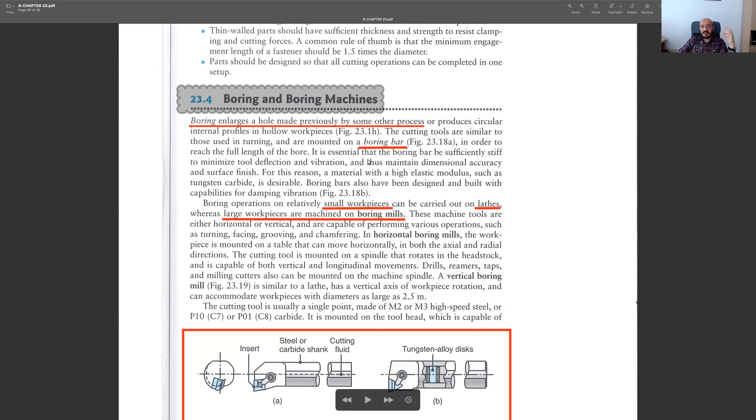In order to do this boring operation, we need to have cutting tools installed on boring bars. Usually this is a boring bar, and at the tip we have inserts very similar to the ones used in other machining operations like turning or milling. Since this boring bar is quite long, in order to remove problems related to vibration and chatter, we need some kind of tools to increase the stiffness of our tools. For instance, we may use special alloy discs or special materials inside the boring bar so that vibration is decreased and stiffness is improved.

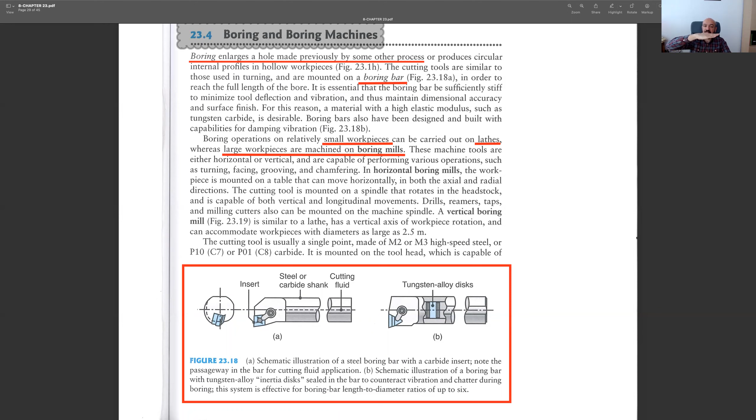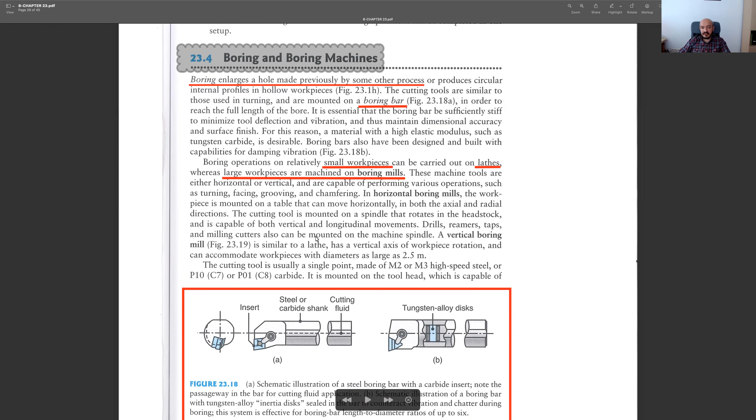We can do these boring operations on lathe machines. We need to simply mount our boring parts into the tailstock and then do the boring. But if the workpiece is quite large, then it's better to consider doing this boring operation on a separate boring machine.

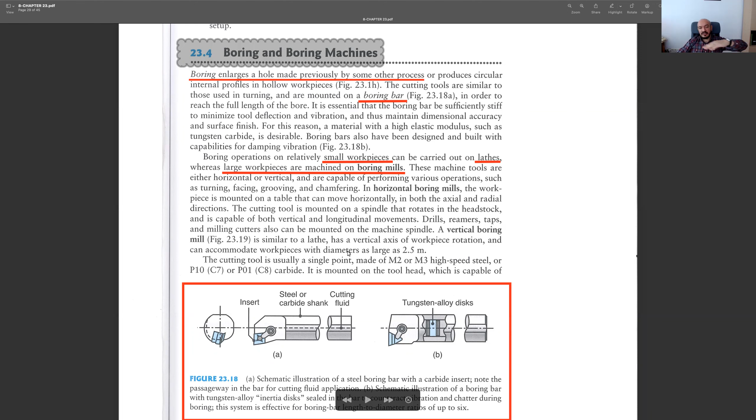We have two types of boring machines: horizontal boring mills and vertical boring mills. The second one is much more frequently used, but their fundamentals are the same. They have a kind of table, and in the horizontal boring mill, very similar to our lathe, the cutting tool is moving in the horizontal direction and going into the workpiece to do the boring operation.

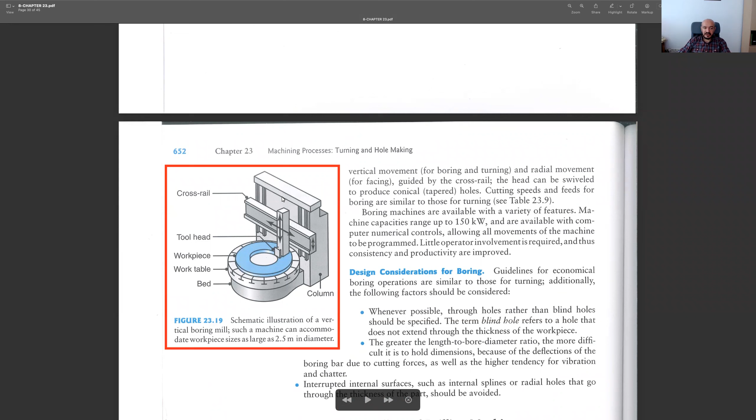In the vertical boring mills it's a bit different. We have our workpiece mounted on a table, rotating at very high speeds, and then we have a cutting tool moving in the vertical plane, only in the x-axis. So these are the main differences between horizontal and vertical boring mills.

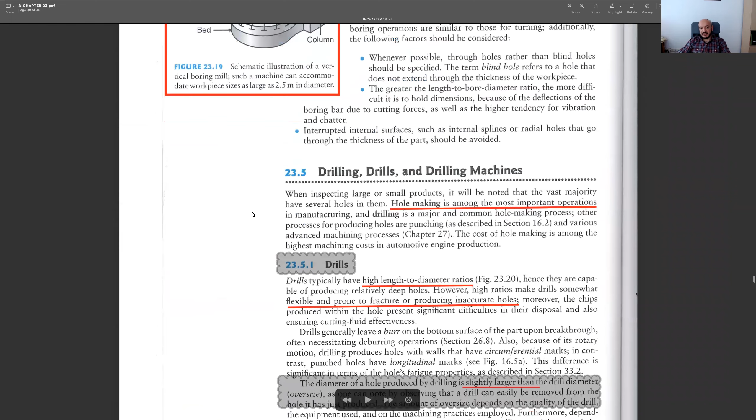Now I will jump to drilling operations. We said at the beginning this chapter is about turning and some hole making operations. Drilling is one of the main hole making operations. The operation is called drilling. The tools we use in the drilling operation are called drills, and the machines are simply called drilling machines. We know hole making is quite important, especially when doing assembly operations.

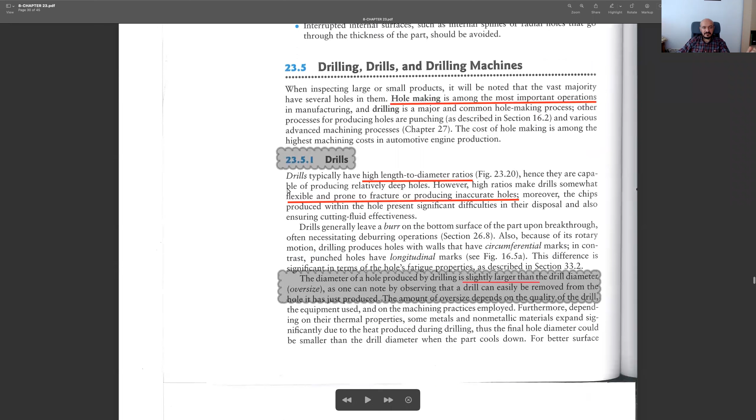If you want to join two parts together, then probably you need a kind of hole in maybe one of them or in both, and then later put some other components inside and join these parts together. The easiest approach to open holes is actually drilling. That's why we have many types of drills, types of tools, and some other types of machines under this drilling operation. I will start by discussing the types of cutting tools we use in the drilling operation.

The tools are simply called drills, and usually they have high length to diameter ratios. Assume this is your drill, your cutting tool. As you see, its length is very high compared to its diameter, and that's why it's quite difficult to have stable drills during the operation. Since they are longer and their diameter is not too large, they are quite flexible and can easily be broken, or you may have cracks on the surface, which will result in inaccurate holes.

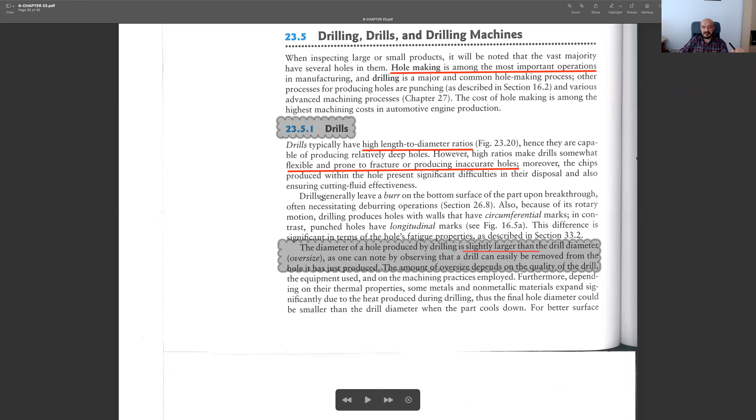That's why after the drilling operation we perform other operations to increase the quality of our surfaces. Another issue about drilling is that most of the time the size of the hole is quite larger than the size of the drill, so that we can easily remove our tool throughout this hole. This has several reasons. First of all, since we have high friction due to heat generated, we get high temperatures around the hole, and the workpiece will actually enlarge due to the high temperature. Then once it's cooled down, its diameter will decrease a little bit, and that's why at the beginning we can remove it a bit easier, since the size of the hole is a bit larger than the size of our cutting tool.

Another reason: if it's a brittle workpiece material, then probably we have removed too much material from the surface of it, and there might be several reasons for this. Another reason is that if your cutting tool is not stable and is vibrating, then probably it's removing more material from the surface of your hole. Due to these reasons, the diameter of the holes we machine is usually larger than the diameter of the drill, and that's a nice outcome since we can easily remove it from the opened hole.

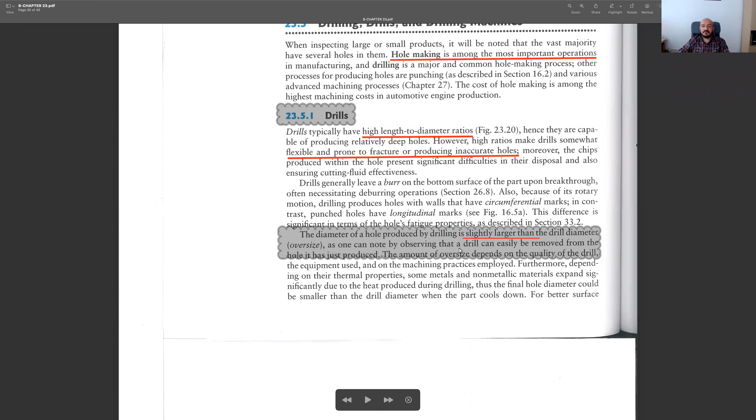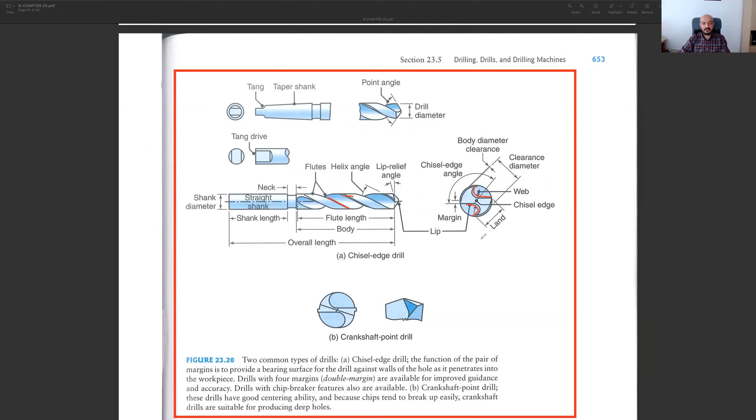We also have some diameters, but they're not as important. The important ones are the chisel edge, the web region, and the land. These are the most important terms related to drills.

Let me continue with some types of drills. The first and most popular one is the twist drill. You can machine most materials with it. You can see some typical angles: point angle about 120 degrees, relief angle about 10 degrees, and other angles like the helix angle, which is quite important since it determines the strength of your tool. We will discuss this more during the videos, but make sure you know what these angles refer to.

There are different types of cutting tool materials. We start our discussion with the twist drill, the most primitive and maybe the most frequently used type. Their diameters range from little to very high. Their hole depth to diameter ratio is not too much.

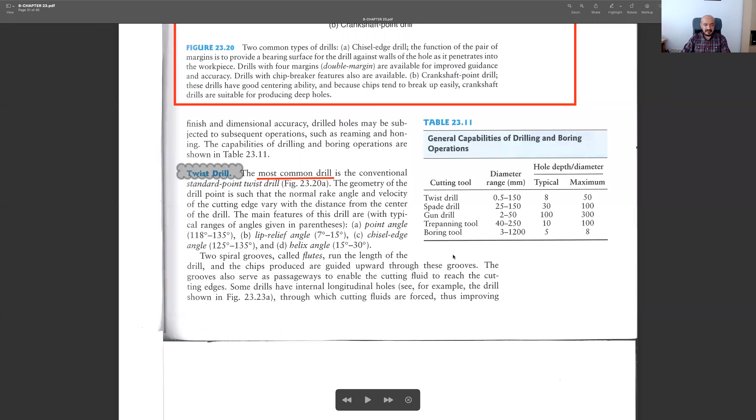If your hole is a bit deeper and the diameter is too small, it's better to use gun drill type cutting tools. These are specially developed for opening deeper holes with less diameter. We'll discuss these in a moment, but this is the first one as I mentioned.

In core drilling, we start the operation on an available hole. Our aim is to increase the size of this hole by very high amounts. We don't just increase the diameter by 2 or 3 millimeters; we are increasing it maybe by some centimeters.

Then we have counter boring and counter sinking operations. These are performed on available holes. Counter boring's aim is to obtain a kind of step so that you can put your bolts into it. Counter sinking is similar, but this time you have tapered conical surfaces, and we use it especially for screws and other joining elements. The difference is that counter boring has a kind of stairs, while counter sinking has conical surfaces.

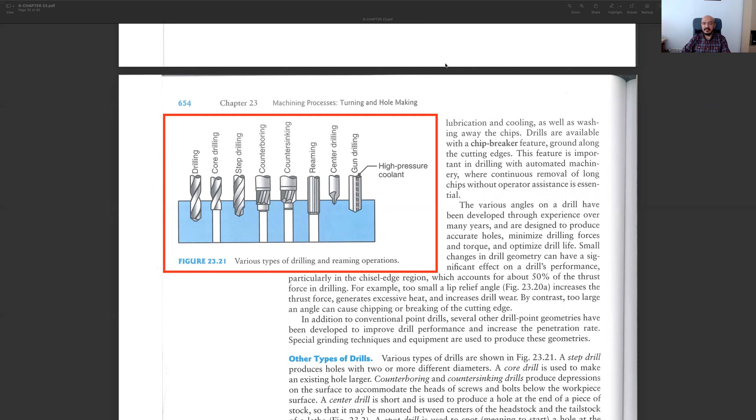Once you have a little hole at the surface, you can then start drilling, since this time the drill will not be able to walk on your surface. And then lastly, we have the gun drilling operation. It's especially used for deeper and smaller diameter holes. Its length to diameter ratio is very high, around 300, and that's why we need special drills like gun drills, so that you'll have highly accurate, deeper, and smaller holes.

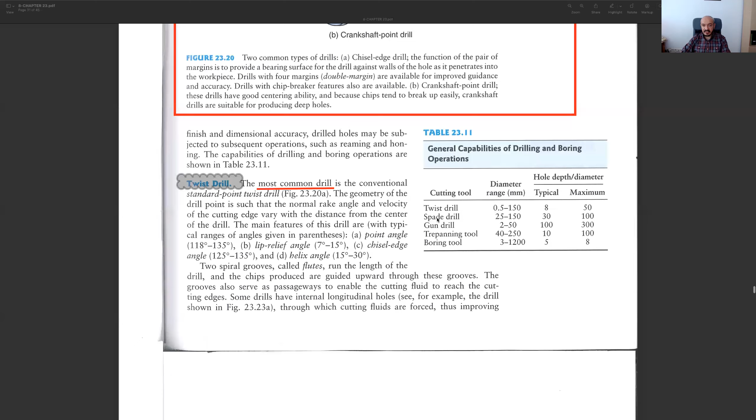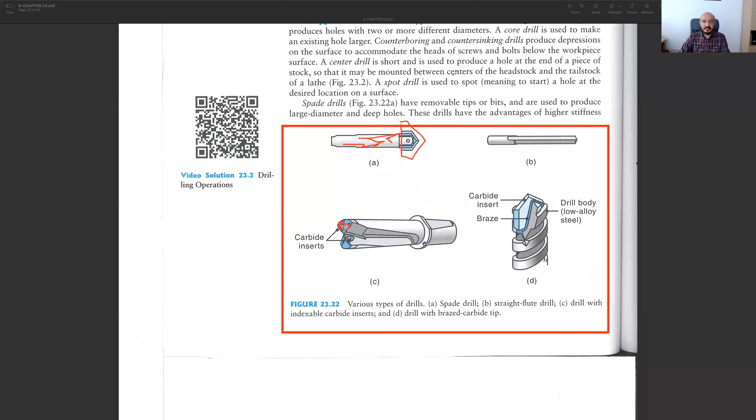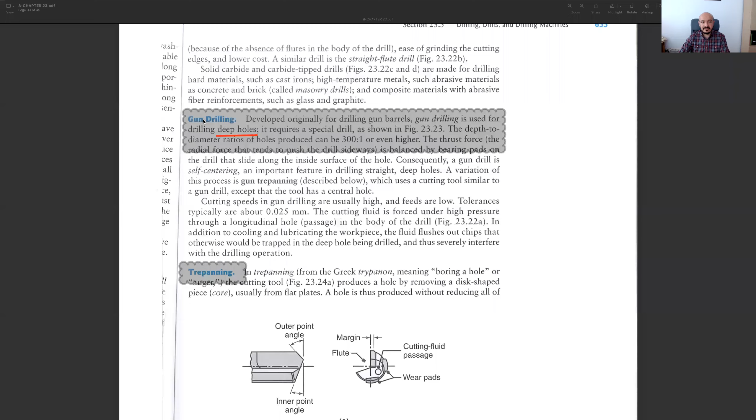Let me jump to the other ones. Then we have gun drilling. As the name implies, this is useful for drilling deep holes with a length to diameter ratio around 300 or maybe even higher. The thing about these gun drills is that you need to have proper chip removal systems and proper coolant application systems, otherwise, due to the high heat generated, you may have problems.

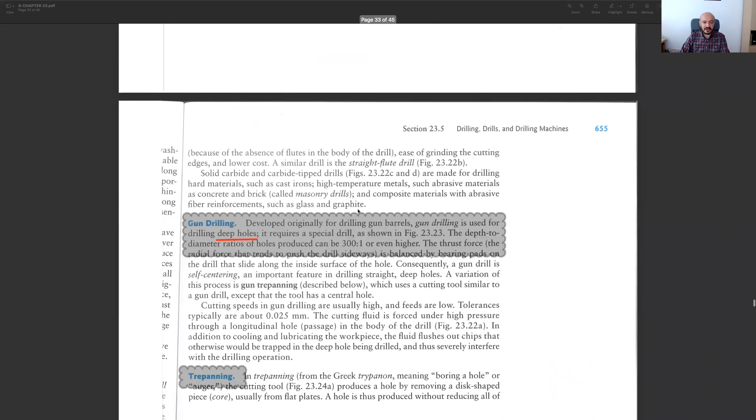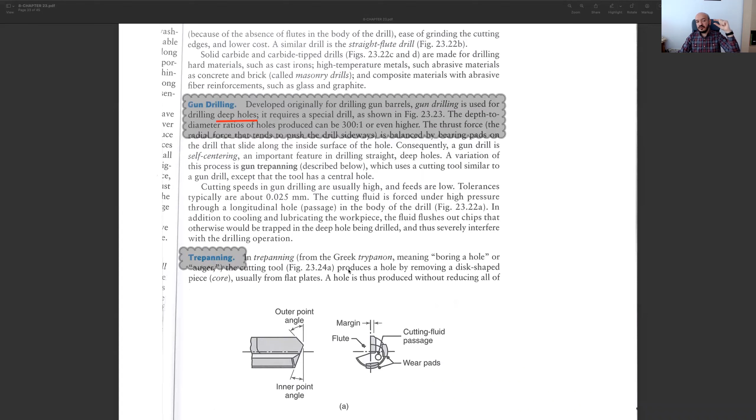Then we have trepanning, which is quite special. Let me show you two types of trepanning tools. As you see, with trepanning, we can machine large diameter holes - this is opposed to gun drilling. In gun drilling, our holes have larger depths - the depth is too much, but the diameter is low. On the other hand, in trepanning, the depth is not too much, but the diameter is very high.

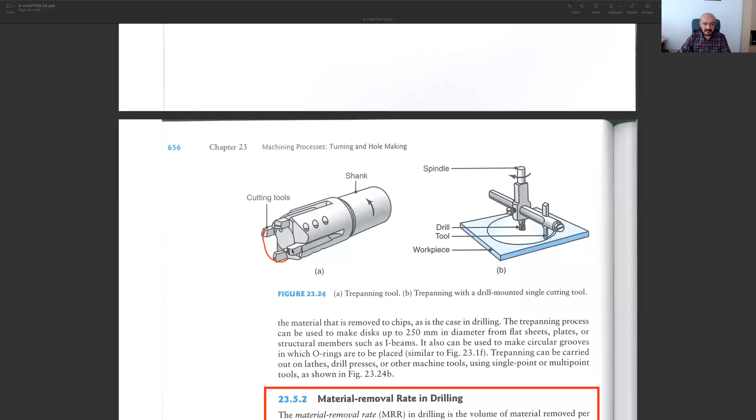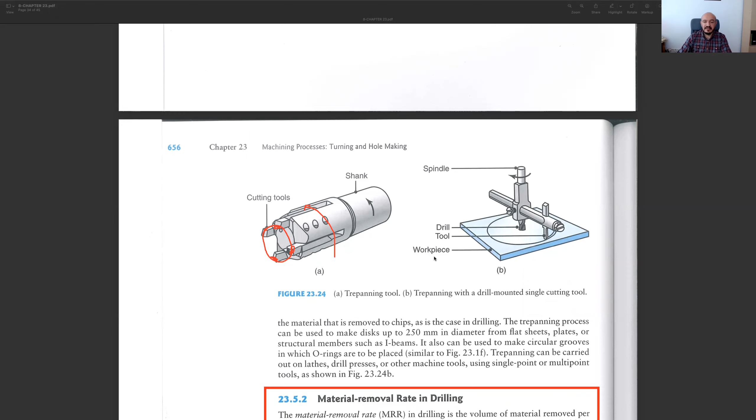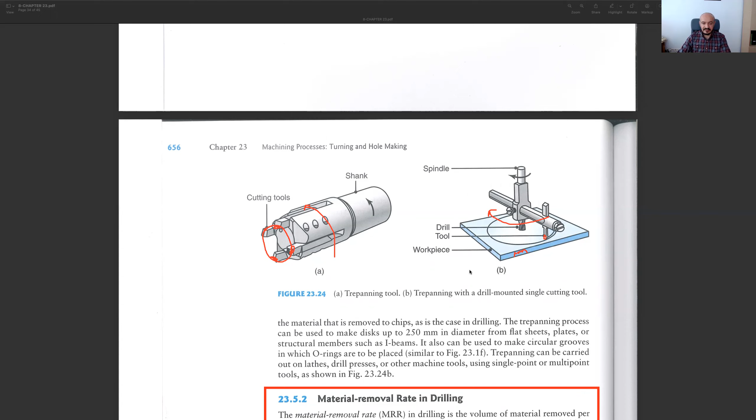That's why we make use of some cutting edges at the tip of this circle. Assume this is the circle we're going to open - if you have, say, 4 cutting edges like this, then once you rotate this cutting tool on your surface, you'll open a larger hole, but you cannot go too much deeper inside your workpiece; the thickness shouldn't be too much. Another application of trepanning uses a single cutting tool, but this time you need to center your trepanning tool and then rotate this single point cutting tool around the center to again open a larger hole with less thickness. This is the main difference with respect to other types of drilling operations.

I would like to talk briefly about material removal rate in drilling operation. It's not complicated - you can assume that we are removing a kind of disc in one revolution. Assume this is the amount of material we are removing in one revolution, so this is our area. What is the volume of it? We can find the volume by simply multiplying with the feed.

This time feed is actually into our workpiece, and I can show the feed in the side view. This is the feed, and we know this is the amount we are removing in one revolution. So it's the volume of material removed in one revolution, and if you multiply with the number of revolutions per minute, we can obtain the overall material removal rate, as we have done in the turning operation.

Let's talk briefly about thrust force and why it is important. The thrust force acts on the drill - assume this part is the drill, we'll have thrust force in this direction. This is our FT, and if you have too much thrust force, you may break your cutting tool here, maybe here, and it will also harm your machine and tool holder. That's why you should be careful about the amount of thrust force - it also affects the torque on your tool holder and machine. So your machine should be able to withstand these torques and perform the drilling operation.

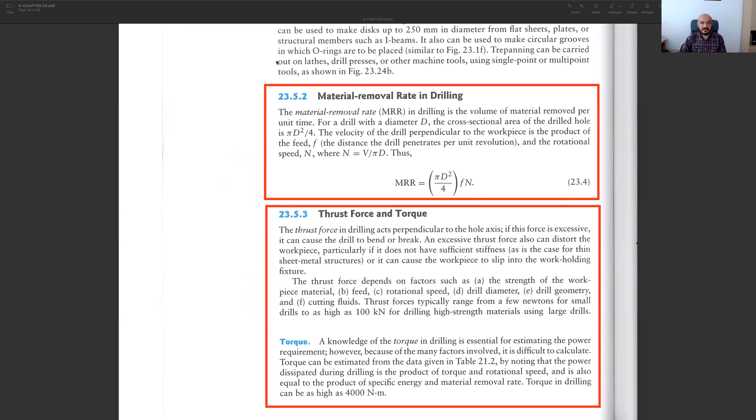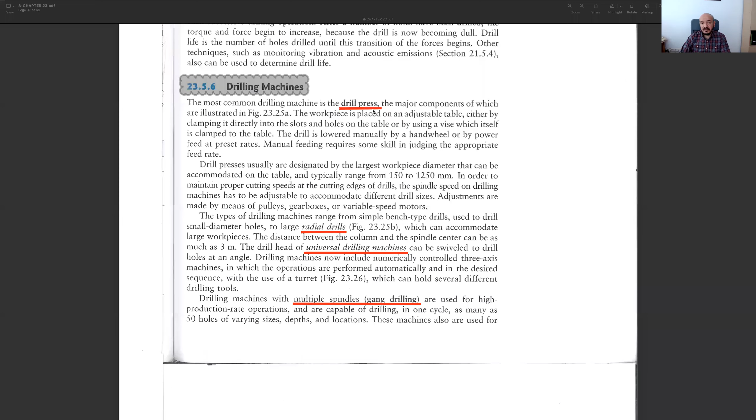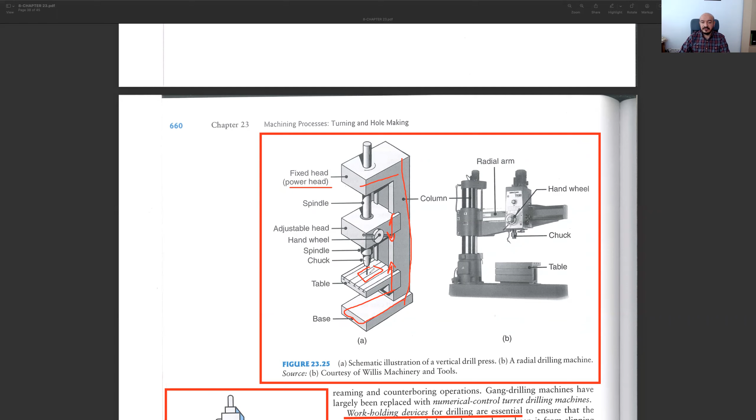Now I will focus on some other types of drills - we have two or three more. The first is radial drills. The difference with respect to drill presses is that the head is adjustable and rotating around the column, and this head can also move on the radial axis. This gives lots of flexibility - you can machine very large workpieces. If this is a table, you can have this much workpiece and open holes on any kind of region.

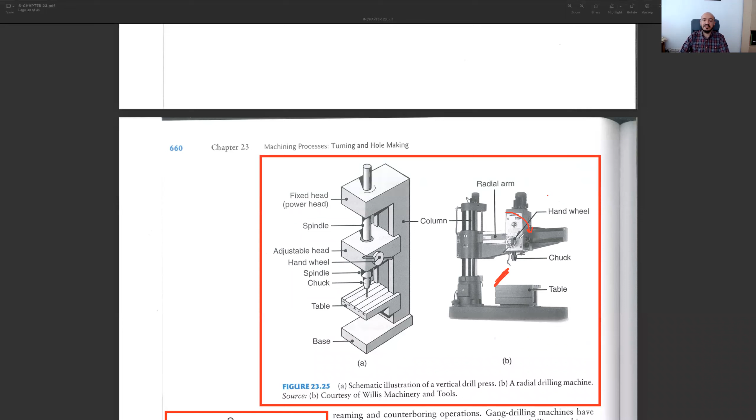In the third type, the universal type of drills, the main difference is that now we can rotate this drill head or adjustable head. This is the only difference in the universal type with respect to radial drills, and you have much more freedom obviously. With the help of a universal drill, you can even open some angled holes, but this is not possible with radial drills.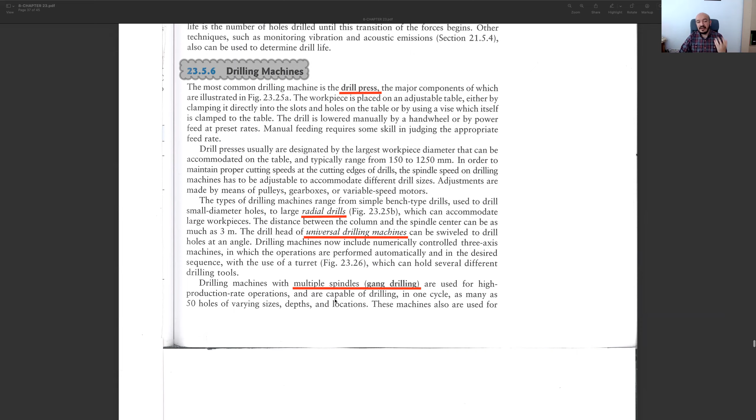So these are the second and third types, and lastly we may have some gang drilling machines. In these machines we have multiple spindles so that at a time you can machine many holes, which obviously increases your productivity - in a shorter time you will have workpieces composed of several holes. This is another example, but the difference is that we have a turret here with different types of drills. Depending on the workpiece and the hole, you may rotate this turret and have a different drill to open different sizes of holes.

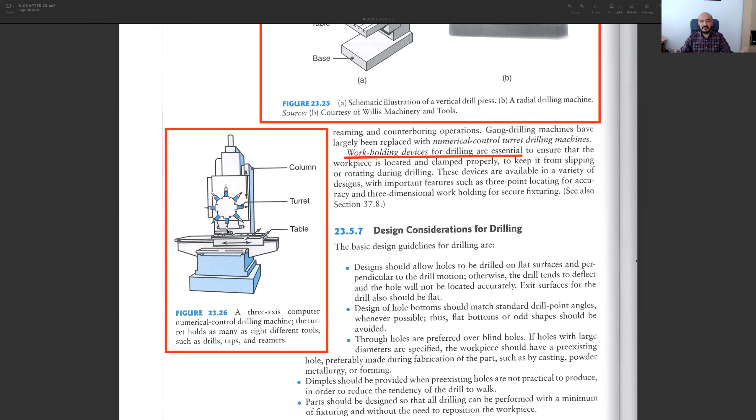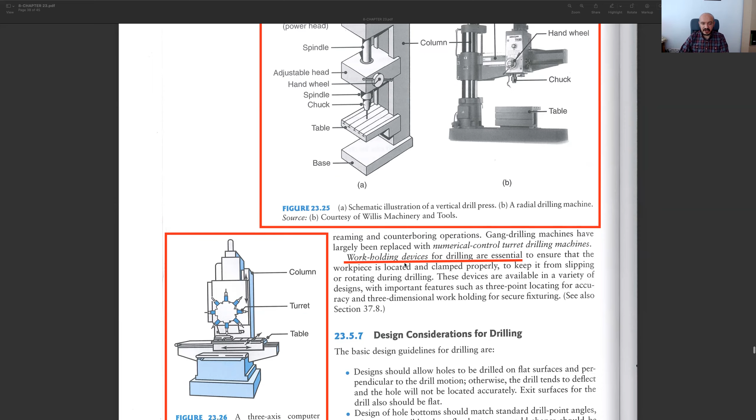Work holding devices are quite important. As I said, we need to have relative rotational motion between the workpiece and the cutting tool, the drill. If you cannot maintain it, then you'll have problems - you can even do harm to yourself and have serious problems. Let me stop for now.